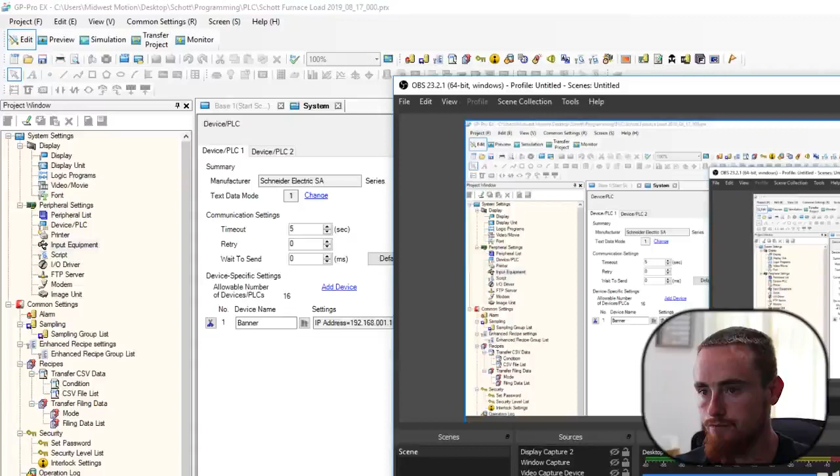Alright, so today I got a video here for you guys to show y'all how to connect the Proface PLC to a Fanuc Robot. It should work with pretty much any robot, especially any of the newer robots. And we're going to do this communication over Ethernet.

Now, I struggled with this for quite some time, and part of it was because I was doing explicit messaging and not implicit messaging, and really the explicit messaging just wasn't working right. So I think that was something on the Ethernet communication end that just wasn't set up, and there's not any good documentation out there.

Fanuc has the best documentation as far as documentation that was actually useful to get this thing set up. Proface was pretty much useless, but I'm going to go ahead and just dive into this thing, and I'm going to take y'all to my screen right now.

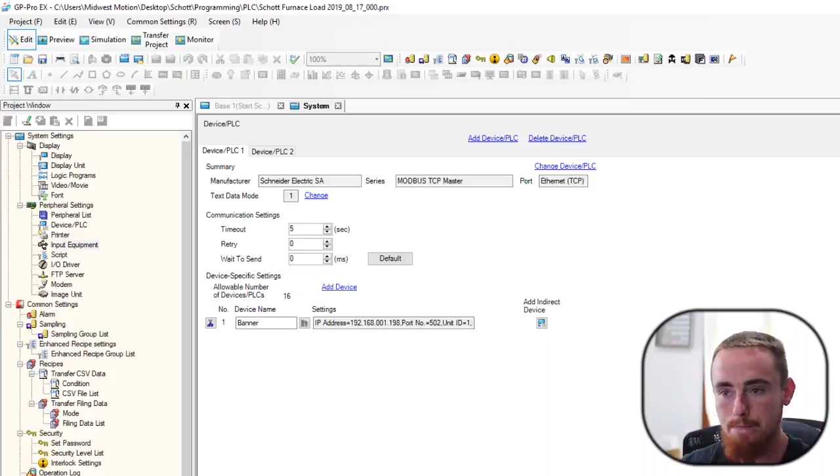So the first thing that you're going to want to do is, after you open up your program and everything like that, you're going to want to go to your devices and PLC. So you click on your devices and PLC right here in this area, and it will open up this screen here. Now what you're going to go ahead and do is add a device.

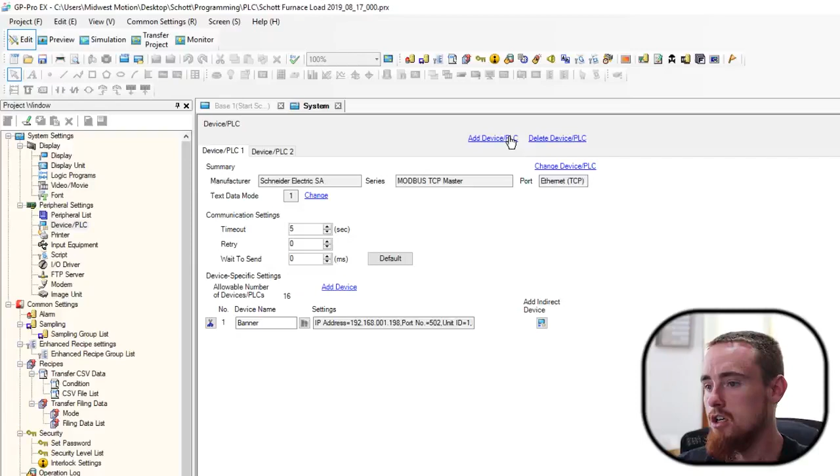So with adding a device, you're going to need to add a manufacturer. And the manufacturer we're going to use is ODVA. Basically ODVA is kind of like a generic Ethernet driver, very similar to Allen Bradley's Ethernet driver if you've used Allen Bradley. Now, that's going to take us into the next step of this video.

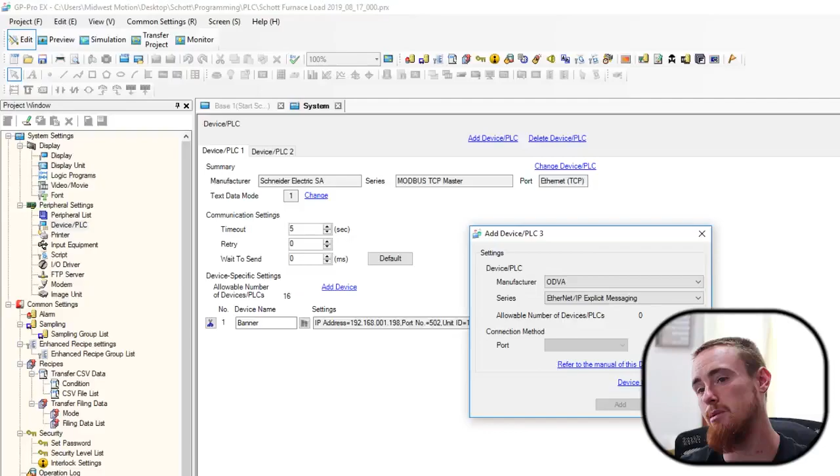Sorry I'm going very fast, but I know there's going to be some skilled guys that already know what they're doing, and they're not going to want to sit here and listen to a long video. So I plan on doing a recap that's going to be longer and drawn out after I run through this real quick. But I just want to run through this so the guys that already have a general understanding of how to do this stuff are able to bang it out and get it done very quickly, because really this process is only going to take like 5 minutes.

So we got to go to the internet real quick, that good old internet stuff. Just type in Proface ODVA in Google.

If I'm not mistaken, you don't need to do anything after you install it. So download it, install it, and then after that, you should be able to use it almost immediately. You might have to cycle power on your computer, but there's really not much. So if it doesn't work and it doesn't show up in this, I would definitely close your program out when you're doing this.

Another thing, this ODVA only works with the 4.08 version of this Proface. So it's the GP Pro EX, and I think it says 4.08 or something like that, or 4.8. I had the 4.0 version or whatever, and that won't work with ODVA, but it should do an auto update. You shouldn't have to pay for another version of this Proface.

I'm trying to eliminate any issues with maybe somebody struggling with a particular part of this video, because a lot of times I'll watch videos and the video has been really good, which there's not many good videos out there on automation stuff, so that's why I'm doing this. But they'll leave out that one little step that either I don't have, or there's some type of reason why I can't do whatever they did on their end.

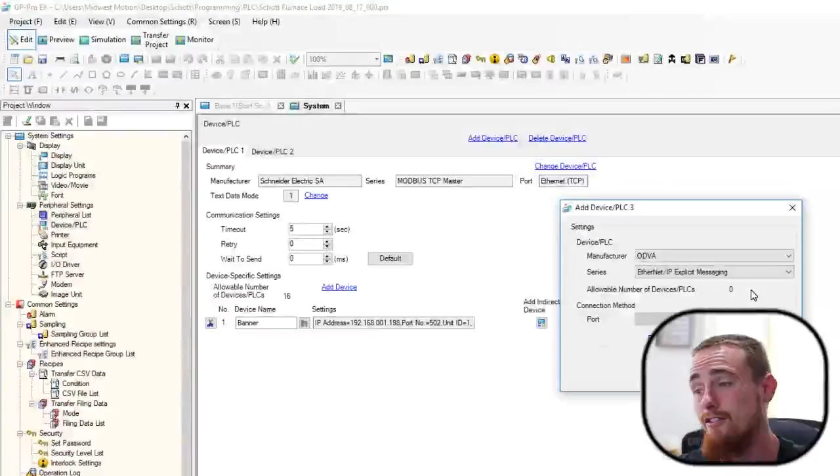Also, I plan on doing more videos on a lot more simplistic detail stuff, so that way people who are more novice, the rookies out there, can kind of get skilled, because this is the first project that I've ever done with Proface, and it was a pain in the ass to learn. Just gonna keep it real with you guys.

Alright, so now I'm gonna jump into here. I had to actually delete my old ODVA because evidently you can only have one, which makes sense. And then I guess you just add multiple devices to that ODVA if you want to add more devices that you're going to communicate to over the network.

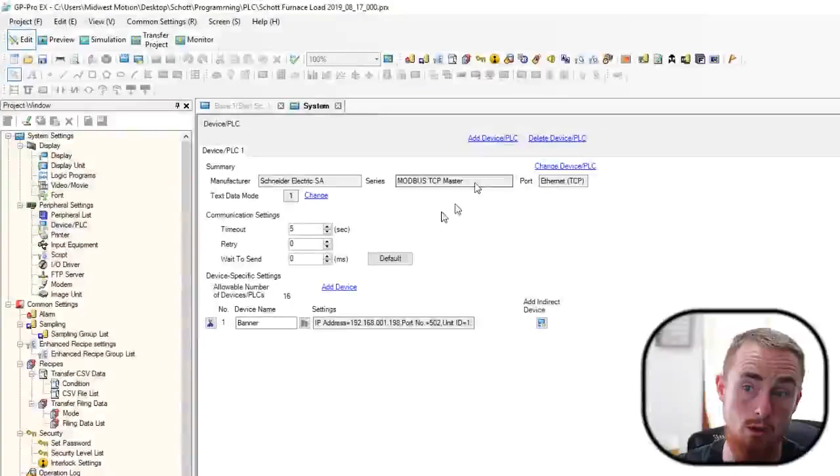Actually, if you see right here, I used Modbus TCP on another device because I just couldn't get the implicit messaging to work with that device, and I even contacted Banner, which was the safety controller we were trying to talk to, and they essentially said, look, we can't do it over Ethernet. For some reason, they don't support it, so you've got to use Modbus TCP, which is actually kind of more simple than Ethernet. I'm almost leaning towards liking that more, just because of the simplicity of it. Everything's almost the same on every device.

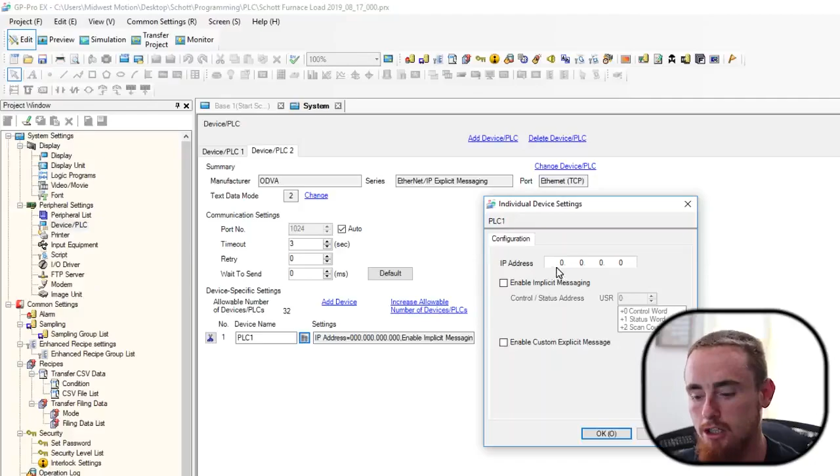So I'm going to go in here, I'm going to click Add Device or PLC. We're going to come over here and go to ODVA, EtherNet/IP Explicit Messaging, your only option, Ethernet TCP, and we're going to add it. Then here it will add your new device, and we're going to come down here to this little box. And when you click into this box, this is where you're going to give it its IP address. I'm just going to say 192.

Not that, dude. Come on, man. 168. No, I'll just do 0 because I'm on a network right now and I don't want to crash the network. And I'll just give it a 10. No, I'll give it an 11. I'll give it a 110. I'll give it whatever, okay?

So we're not actually done here. One of the things that I struggled with whenever I was doing this is this enable implicit messaging. I think part of my issue was I had implicit messaging enabled when I was trying to do explicit messaging, so I think that's why it did not work. There's a lot of little things that, especially for a rookie, they're not going to understand, and they were big hang-ups for me.

So I kind of thought that this is what this was utilized for, but you have these different options. You have a control word, a status word, scan count. These USRs right here, if you don't know anything about Proface PLCs, USR is basically an internal memory register. And with that internal memory register, you can assign different stuff. We're going to use 800 because that's what I used in my last project. But really, you should be able to assign pretty much anything.

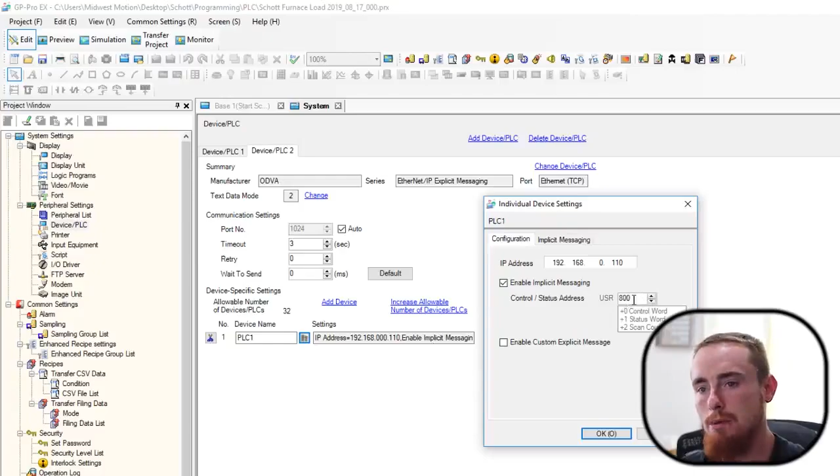I remember reading some type of documentation that says don't use the first few words of memory. So just put it wherever. But, oh, shoot, we weren't done there. So I'm just going to assign it an 800. Now, whenever you go in your PLC logic, you're going to actually have to assign like an 801, I believe, as a bit address, and I should be able to take you guys through that. And that's what actually turns on this implicit messaging.

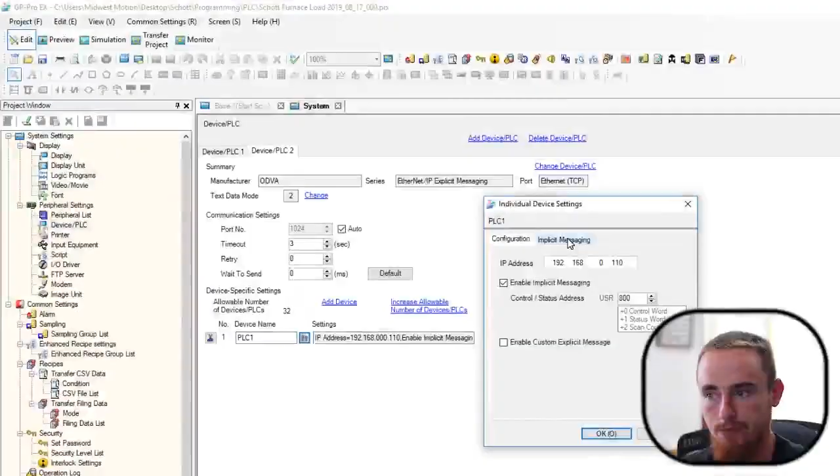So I don't know why it can't just be turned on from here, why it has to be turned on from the ladder logic. It really doesn't make any sense to me. You'd think checking that box would be enough, but whatever. You just got to do what you got to do. This is a lot of stuff that I think is antiquated in the industrial industry. It just makes no sense why that has to be rung in the ladder logic.

I guess if you wanted to be able to turn it off and on during parts of your logic, but I'd rather just have a checkbox here that tells me either turn it on or turn it off, and it's going to be on or off all the time.

So then we're going to the implicit messaging screen. Now in here, I'll be honest, I don't know what these numbers are at the moment, but I went ahead and did a screenshot of the numbers that I got for that. Basically your size, this is actually very similar to what you would set up in Allen Bradley's generic Ethernet IP module. So I'm just going to give both of these a 32 because I believe that's what I was talking to my robot. Now, this number, if I'm not mistaken, you could potentially get this wrong and not have issues, but that kind of depends.

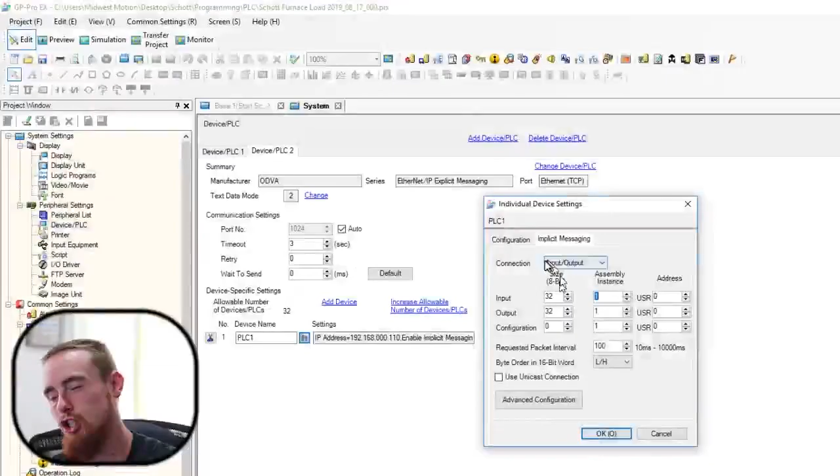I can't remember which one it is, but one side or the other, if one's bigger than the other, it can cause issues. And it depends on devices. Some devices can internally handle it. Some devices cannot internally handle it and will kind of fault out and give you Ethernet IP errors and whatnot. So I'm just going to give it 32, 32, leave the bottom one here a 0. So that's your input and your output. Notice the size is 8 bits. I believe the robot is 16 bits, so you've got to be sure to double that on the other side.

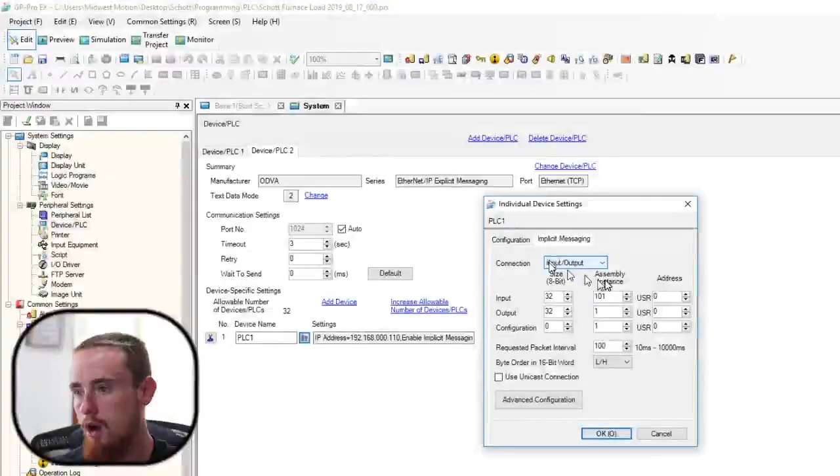Now your assembly instance is 101 and 151, which I'm very familiar with because of setting up these robots in Allen Bradley. That's something that we do quite frequently, setting up robots, the Fanuc robot, and being able to talk to it over Ethernet. But generally we do this in Allen Bradley. So whenever I initially did this, this is the part that I got set up to, and I did not assign an address right here. And this is why it did not work for me, because I just didn't know that I needed to assign that.

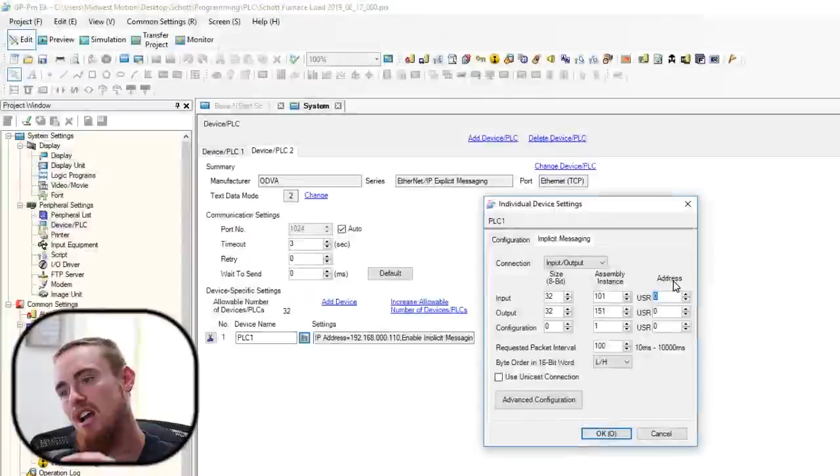It crossed my mind, and I started going down this path one day, and then I just abandoned it and didn't come back until like a week later. Now, granted I wasn't working on this for an entire week, I had other things going on. But point being, I was right there to almost getting this thing complete, and then I didn't because, well, I abandoned it.

So if I'm not mistaken, this here needs to be assigned to just whatever various numbers that you want to assign this to in the internal memory. So we used 500 and 600. Remember, this USR is the internal memory of the controller. And these are in words. So these addresses are in words. And then in the symbol list, you call these out by bit level. And then we just use 700 for this.

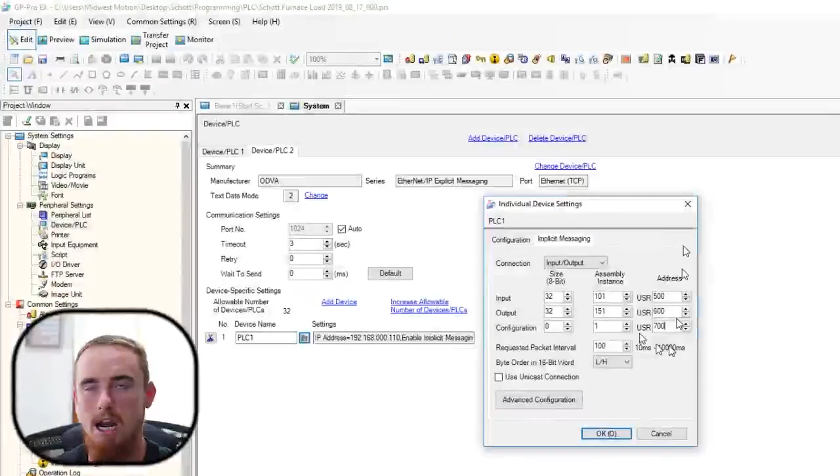Now the configuration I don't believe you use for anything. Allen Bradley auto generates this, and that's one thing I don't like about this Proface PLC: it does not auto generate any of this in the tag database the way Allen Bradley does whenever you use a generic Ethernet module. So I believe at this point we're okay. We'll just hit OK. I'm going to go back, verify that everything looks all right. Looks good. We're going to hit OK. Now just kind of ignore the current IP address I've got in here because I don't know what I did on the robot side of things.

Now here in a second I'll go back into the symbols list, which is up here, and I'll show you all how to create an address. But just in case somebody already knows how to create an address in Proface, I'm not going to worry about going into that. But that was also a struggle for me because I couldn't really figure out how to get an address.

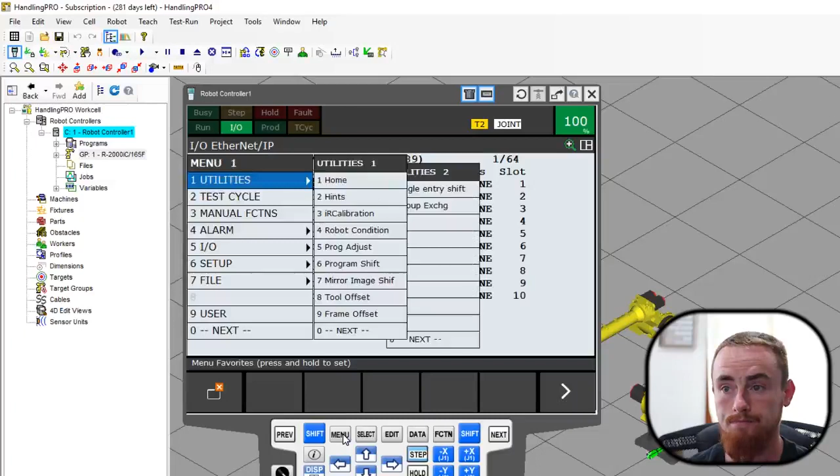So now we're going over to ROBOGUIDE, which is Fanuc software for being able to have a virtual robot in here. Now the reason why I'm using this virtual robot is just so that I can be in a clean environment, a quiet environment, so I can shoot this video at the best quality I can.

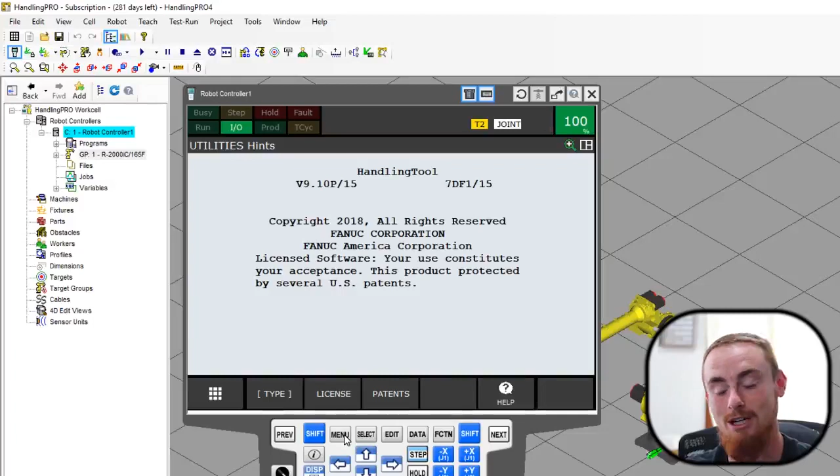I almost wanted to do this on the actual robot, but it also made it a lot easier to do the screen recording part as well, so that way I'm not just recording the teach pendant with a camera and having garbage video, because that's how 90% of all Fanuc videos are, somebody just holding the camera and doing the teach pendant while they're trying to shoot this video. Plus it's always loud and you can hardly ever hear anything, and it's already loud where you're working because you're probably out on the floor in a factory or something.

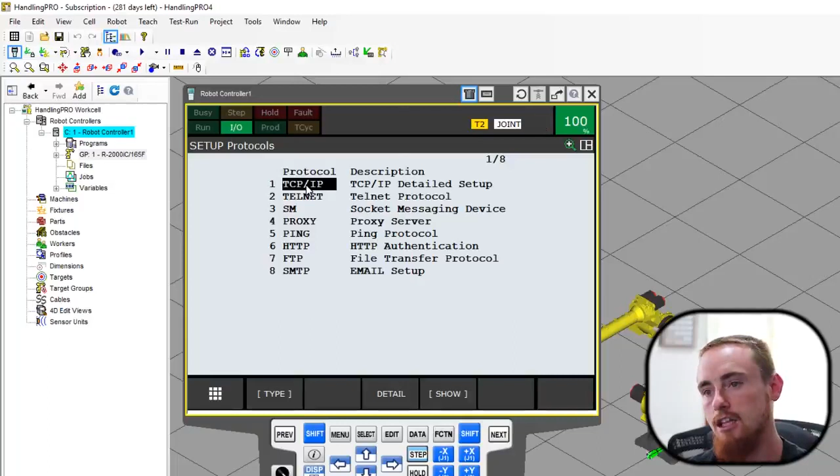So here we are at basically the main screen, but it doesn't matter what screen you're on. You should be able to just hit menu, go to setup, host communication. Right here is what we're going to select. So now we're at TCP IP, that's what you're wanting. And then here you're going to give the robot an address, I'll just give it 192.168.10.100. Now, like I said, don't really worry about my IP addresses.

Sometimes in this router area, I will throw in a number. I don't know if it needs one or not, but sometimes I like to just do this because I've noticed some devices are really particular about this.

What are you doing, dude?

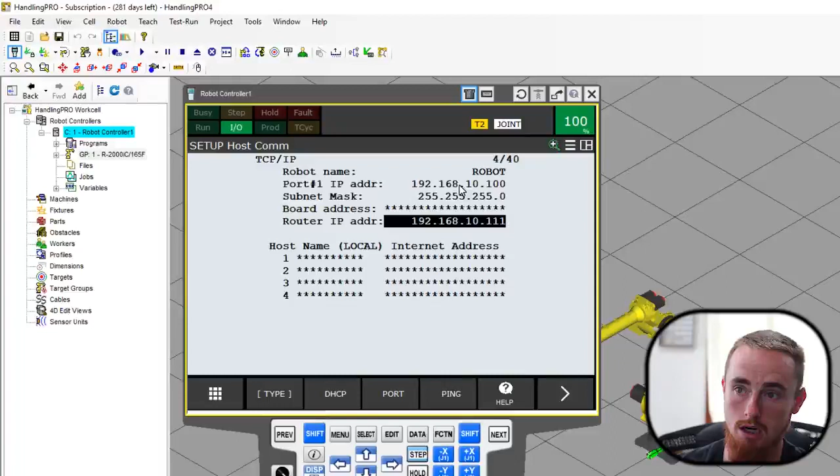111. Give me 111. Alright. But I just put this on the same Ethernet network, basically. From this screen here, I believe this is all you need to do. Now, I'm not going to be able to really set this up for you guys. Notice the port 1 thing, that does matter. I believe that's your top port on your Fanuc controller. So just pay attention to this port 1. Port 2, that's kind of important. You can ping it from here, which is really useful.

Funny thing is, I talked to a Fanuc guy, and he was like, yeah, ping's useless. And I'm like, what? What, dude? Whatever you say, dude.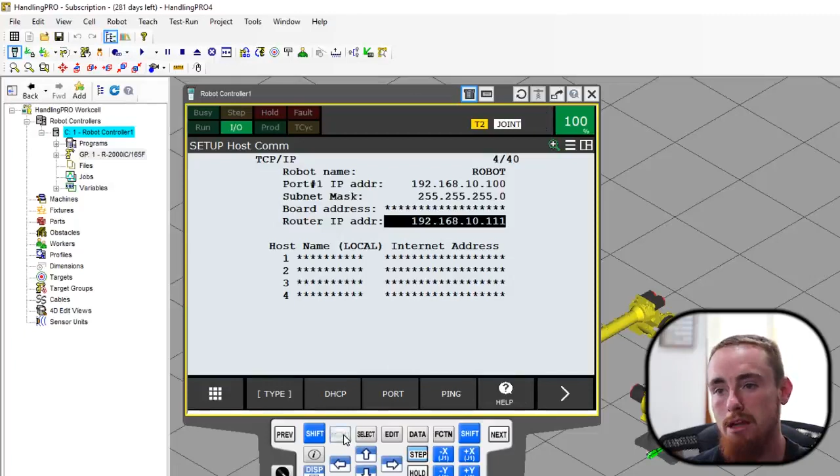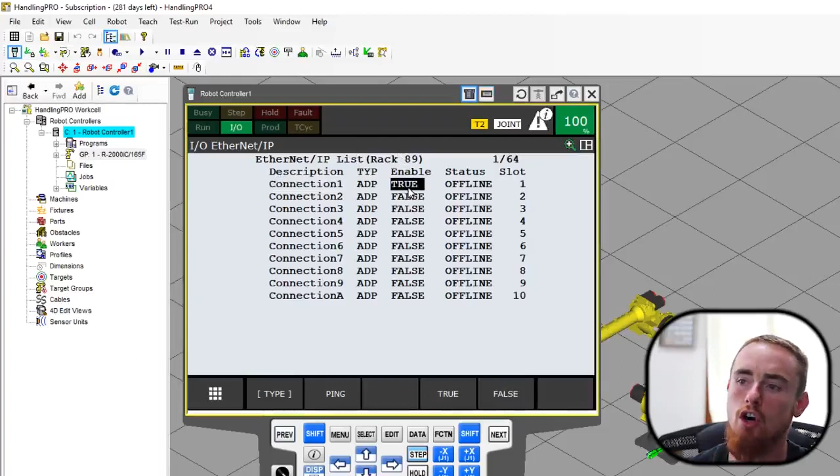So now we're going to go to the menu screen again. We're going to go down to I/O, Ethernet IP. Boom. So now we're going to hit this configure button down here. And here's where you set how many words you're talking. Why can't I configure this? It's read only, dude. It's because we're enabled. So you've got to take this and turn it false. And it's really funny, there's all kinds of little stuff. Somebody not showing that one little part of setting that false could be the difference of somebody being able to figure this out or not.

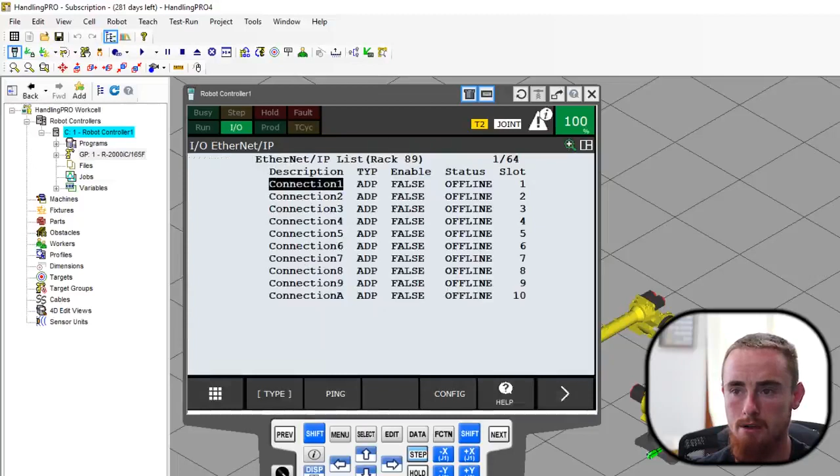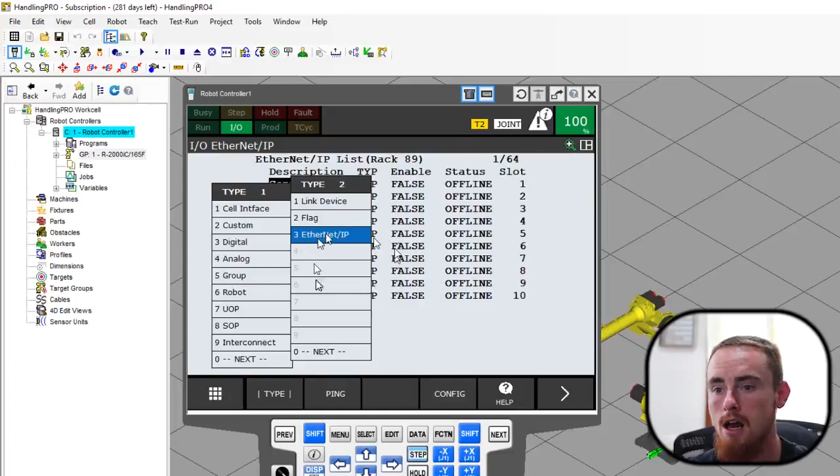Oh, and another big thing. If you do not see this Ethernet IP in this I/O list, so when I do menu, 5 I/O, and I go to type, if you don't see Ethernet IP in here, you do not have the Ethernet IP adapter option, which is the minimum of what you need. You could get the Ethernet IP scanner option, which gives you the adapter and the scanner. But all you need for what we're doing here is the adapter option. So make sure you have that installed on your Fanuc robot. That's going to be a Fanuc option. I'm sure you've probably heard of those. They like to sell those a lot.

So now that we have it installed, which I'm not showing, maybe that'll be another video that I do for you guys. So hit that button.

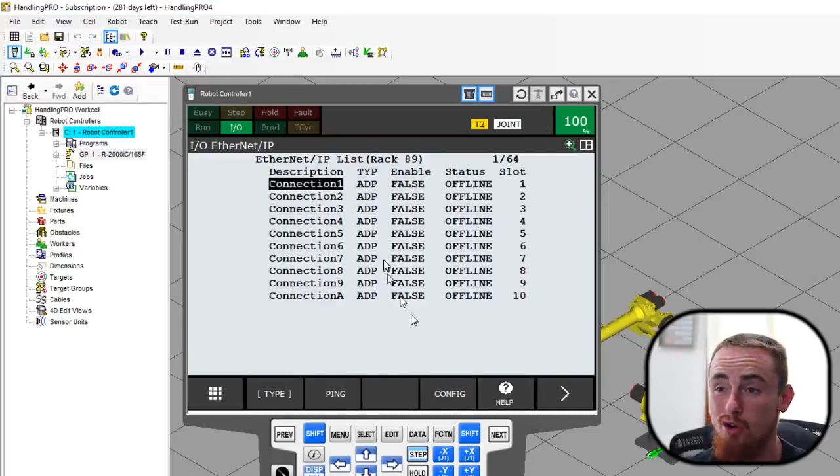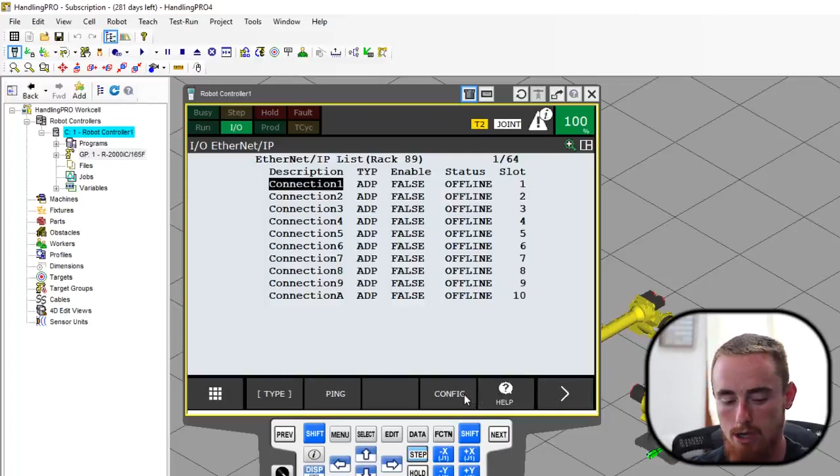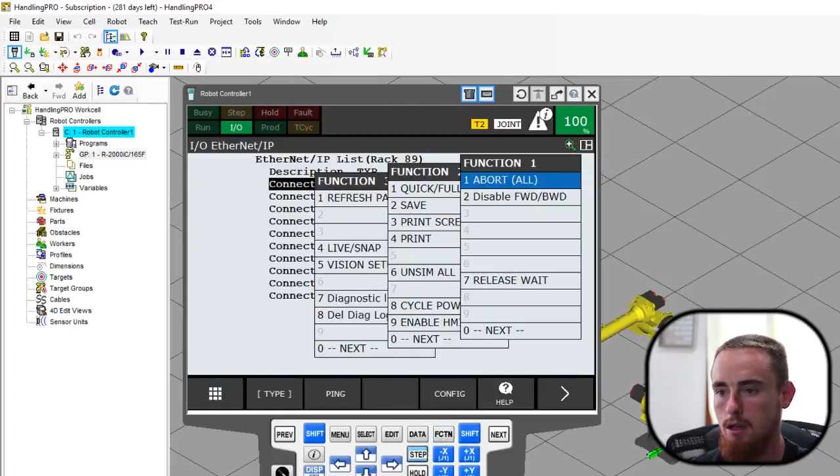I probably should be using this thing right here so that way y'all can see me moving around a little bit easier. Oh well, it is what it is. We're just going to cycle power on this thing. It's gonna do its thing.

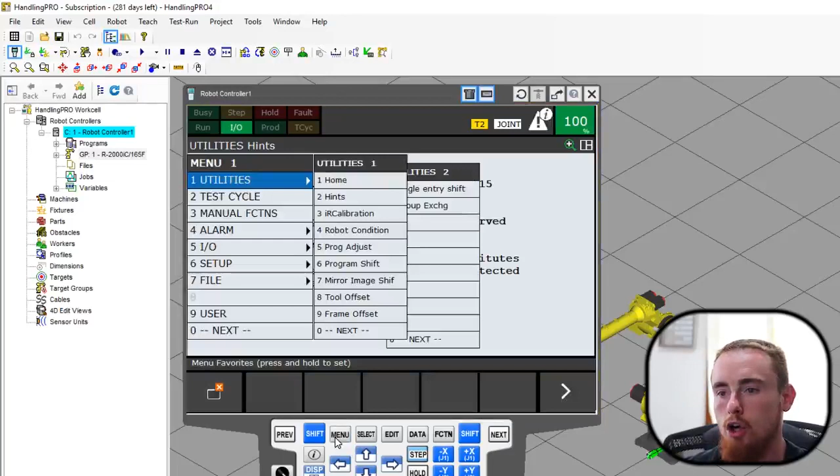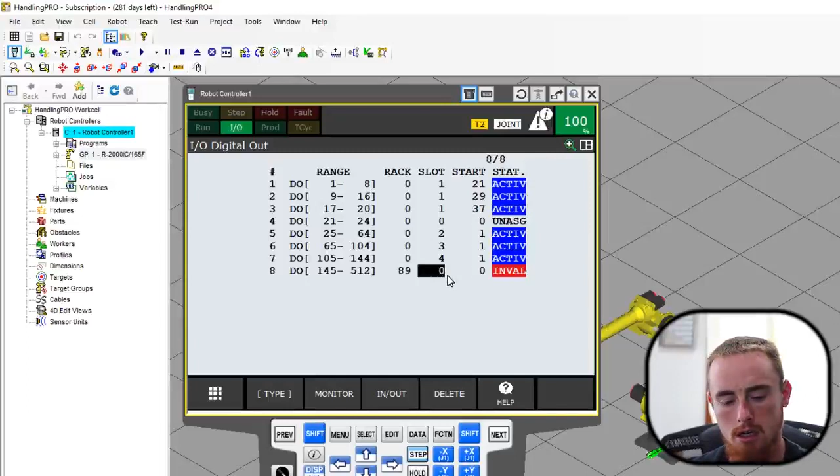Reboot on us. All right, now that the robot is booted back up, we're gonna go back into menu, I/O, and then I believe we just need to go to digital I/O. So in your digital I/O, these are the outputs. Configure. Now I'm not really sure if I should make this another video or not, but the quick of it is you're gonna use rack 89, slot 1, and then your start point will be wherever you want it to be, pretty much. Being this Ethernet IP, it doesn't really matter.

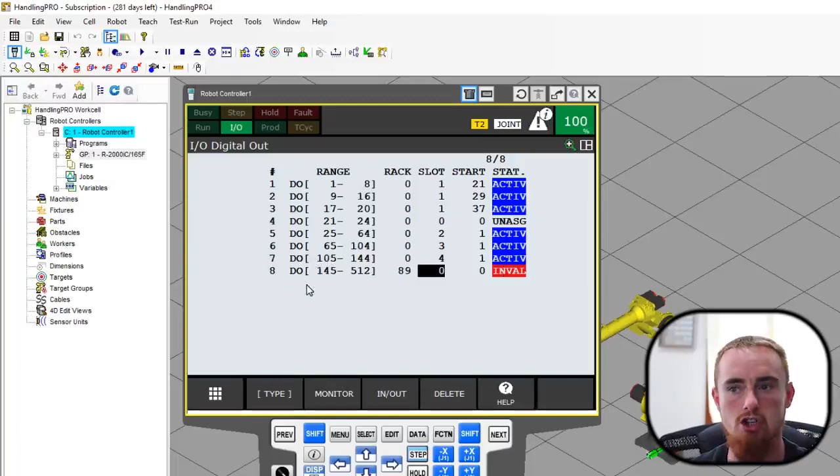I think generally we always assign our UOPs to be like the first word of information, just because UOPs never change. They're always the same, whereas your digital inputs and outputs might change on a project. So yeah, you just want to do rack 89, slot 1. Why is it telling me I don't like? So it says it's pending.

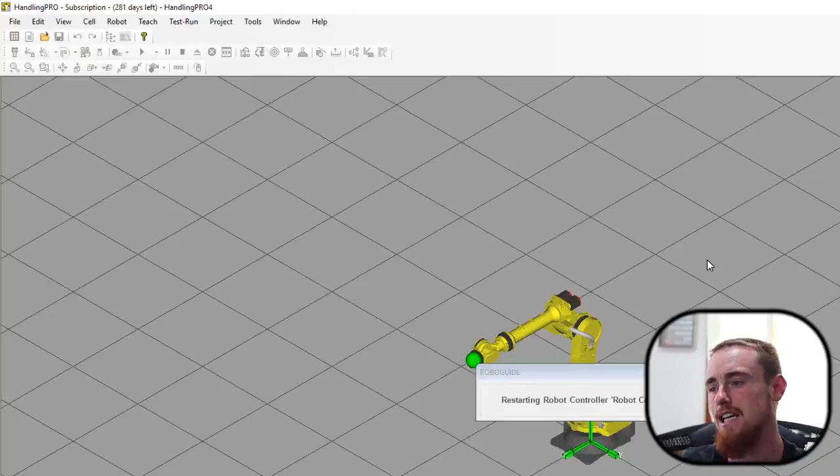We're gonna go ahead and cycle the power on the controller again, because that's what you always got to do. You got to cycle the power on the controller every time you make one of these Ethernet IP changes, any safety changes or anything like that, to like DCS or whatnot. Okay, now we're gonna go back into menu, and I'm kind of just showing you guys how to go about doing this. I'm a clicker. I like to click around a lot, whether I'm going there or not. I click on the wrong things all the time.

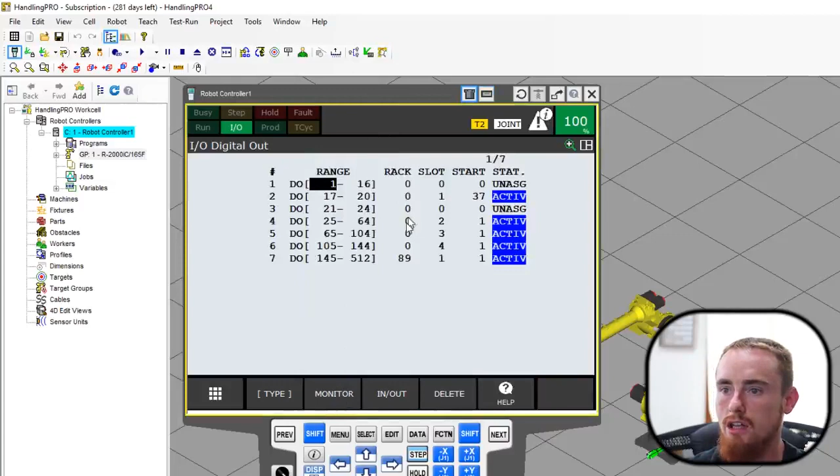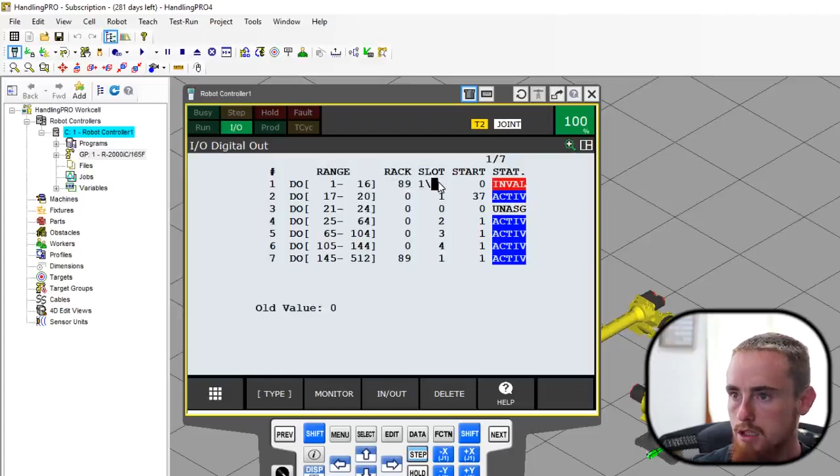So here we are in our D-outs. Okay, we got stars here, which means something isn't configured right. Oh, that's because I assigned this. Okay, that's why. So I can do one to, let me just do. Notice that we're active here. I'm actually going to do something else real quick. I'm going to show you, kind of getting off topic of this video. Really, this needs to be another video on how to set up the Ethernet IP to the robot. Mainly because, why is it making me assign it to 1?

Alright, so we got this Ethernet IP. I'm going to go ahead and boot the controller again just because I want to show you how it should look whenever you're done with that. I'll do another video on how to actually go more in depth on how to set up the Fanuc I/O.

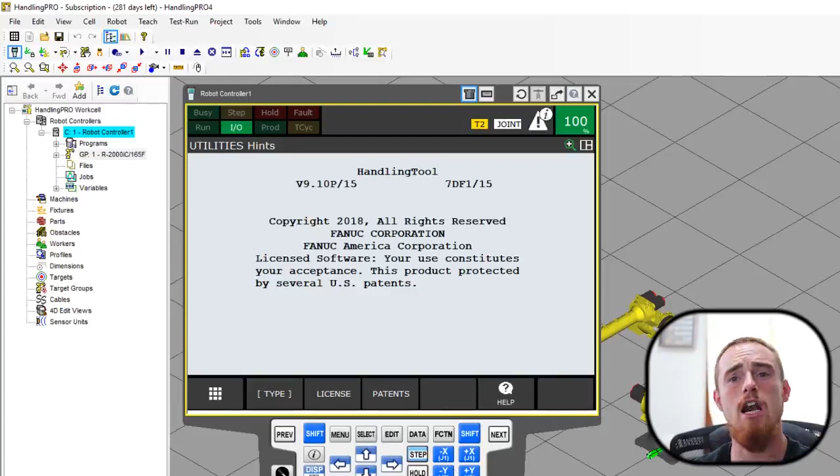So I don't have that video out yet, but I will go into detail on how to set up I/O and how to go into more steps, so that way I can keep videos more targeted towards what we're doing. And I'm actually stretching this out way longer than what I wanted to.

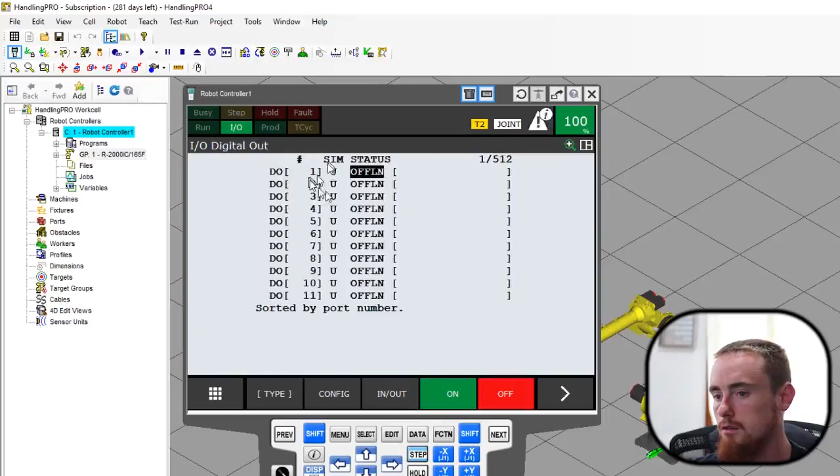So go back to I/O. You can actually click this I/O button down here too, and then just go type. Back to the digitals. Status offline. Oh, that's offline because I forgot to turn the. This is good stuff to see. I mean, it was a mistake that I made. But notice that they're assigned now. They're not the stars here anymore.

And the mistake that I made is we need to go back to type. We need to go over here to Ethernet IP because I forgot to turn that back on. So now we should be able to go back into I/O and click the I/O button down here. Boom. Now we have statuses of these.

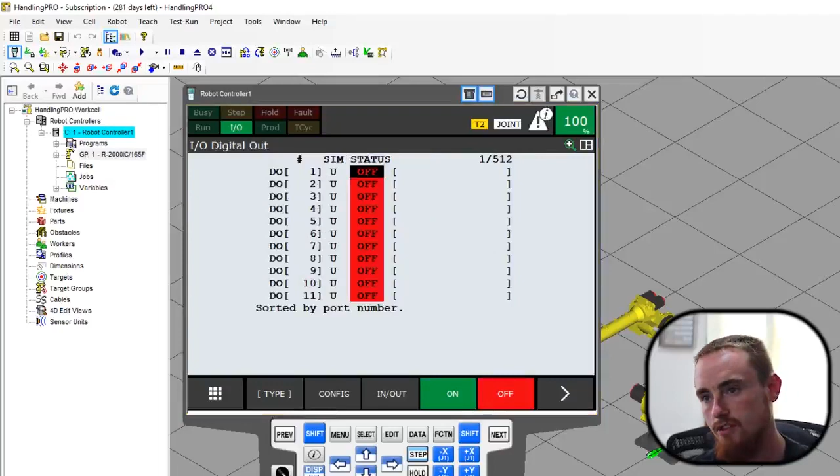There's a way actually to make this virtual robot communicate to things out on the network. So if you wanted to test communication stuff, I'm just not quite sure on how to do it, or if there's really anything that needs to be done. I mean, because this thing essentially is a robot in the computer. It's just a virtual machine basically.

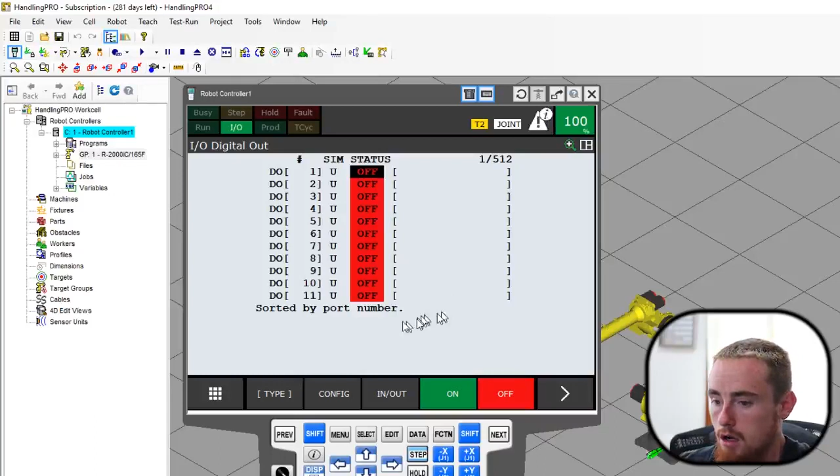So this kind of concludes really all that you need to do on the Fanuc side. There's really only a couple things that need to be done on the Fanuc side of things. So now we're going to go back into the Proface software, and I'm going to show you guys the addresses. Now, here we've actually got quite a bit of stuff already created.

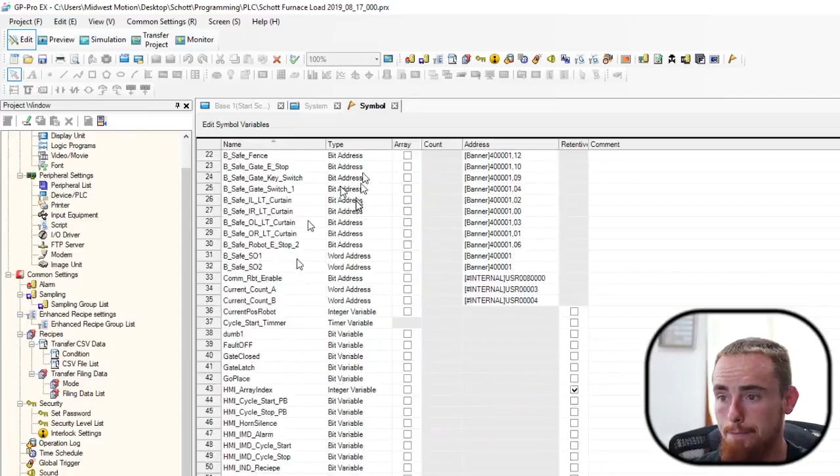And so all these internals that you're looking at, remember when I assigned these to like the 600s? So here's where it's addressed at like 603. So we're talking to the fourth word in the robot. So that would be like group input 4 that we're talking to. And that's just because of how I have it assigned on this particular project, is that I did all my group inputs first, I believe. Maybe not, I don't know.

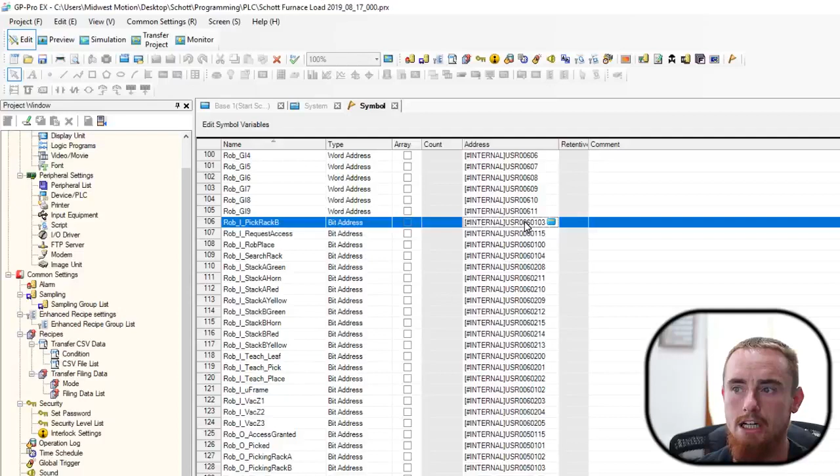But here's where we're calling this out as a bit level. So notice it added 2 more digits to the back side of this word address. So I'll just show right here actually. You can click into here and you can change whether this is a bit address, word address, whatever. And that just gives you the ability to plug in more numbers back here. Here's kind of the wizard behind it.

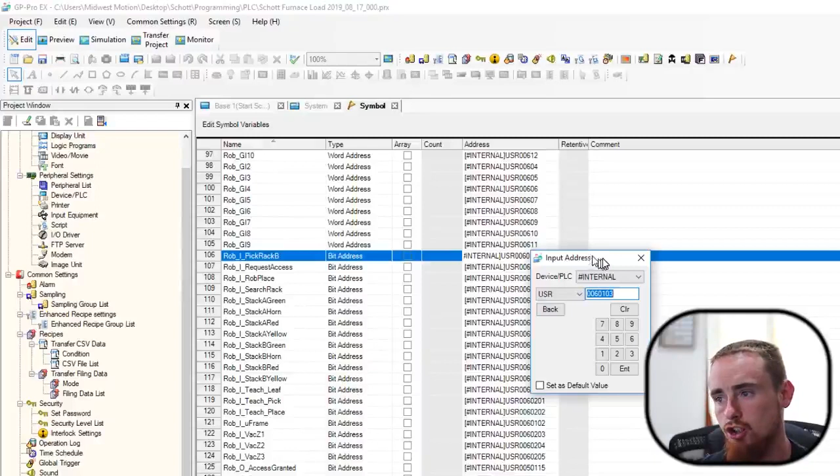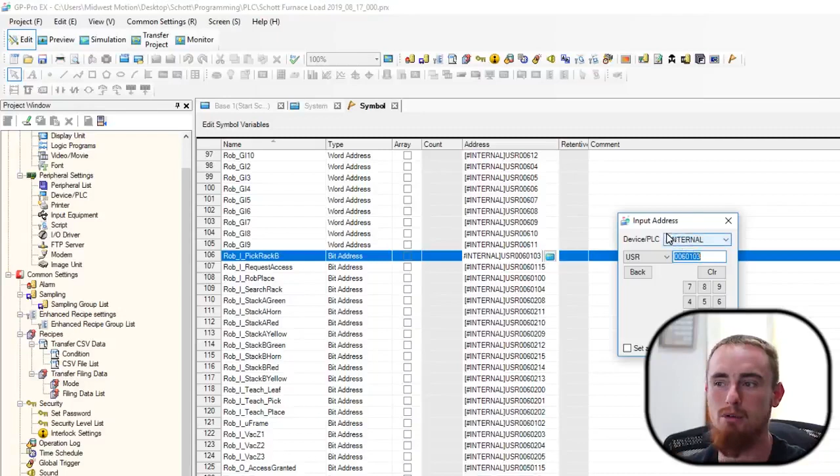There's not really much that guides you in the right direction. So unless you know what you're doing, you're kind of screwed as far as how to address this thing. Super experienced guys are able to figure this out quickly, but the generation that I'm more so in, especially the newer guys coming into this, they're so used to wizard-based stuff, being able to plug in a number here, plug in a number here, then go find what that number is and plug it in. But this is like you just gotta know where you're communicating to.

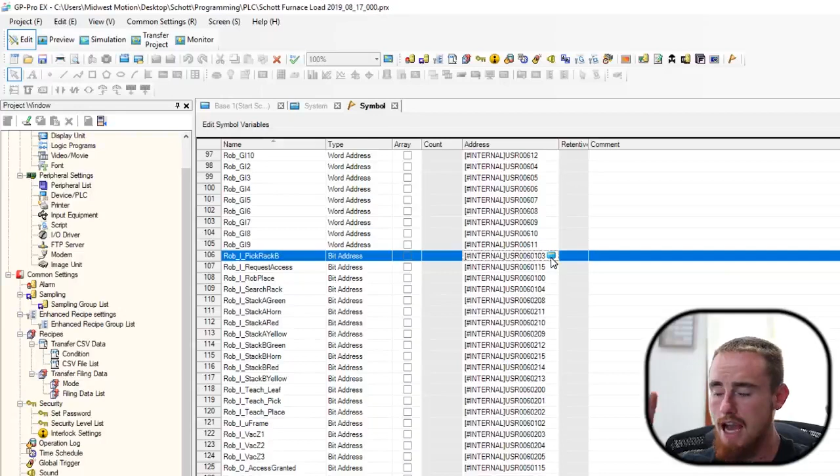I don't have any examples on this project anymore where I was talking explicit messaging, but you assign this to the internal memory. So basically the Ethernet jumps out and captures everything that the robot is currently and writes to the robot, but there's like a buffer in between the actual PLC's ladder logic and the actual communications driver. So the driver is talking to these internal registers right here, and then the PLC communicates between these internal registers. So it's like a buffer. There's not a direct correlation where you talk.

Whereas when you're using explicit messaging, that's going to be the big difference between implicit and explicit. Explicit messaging talks directly to it. There is no in between. Essentially, your ladder logic is almost your driver in a sense, or at least some layer of that.

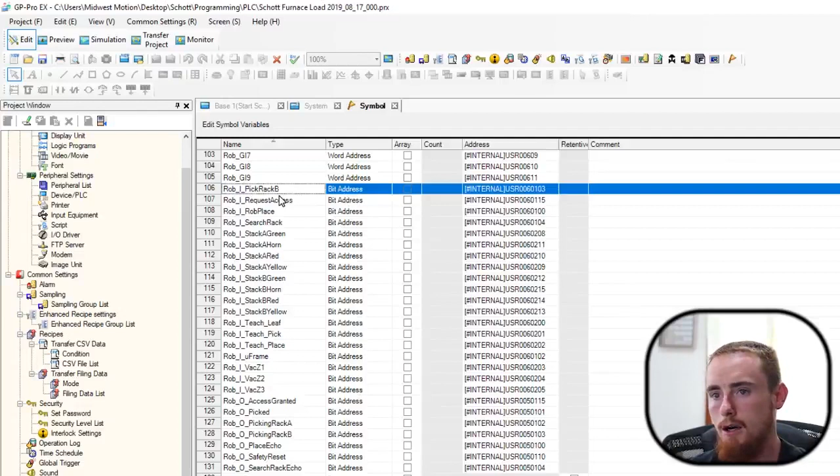And then after you create these variables here, you can give them whatever name you want. So yeah, that kind of takes this video to an end. Just remember with this word address and bit address thing that it's going to give you and take away those extra digits at the end, whether you're talking to a group input where you need to use a word address, or to an actual bit like a digital input where you need to talk to it as a bit address.